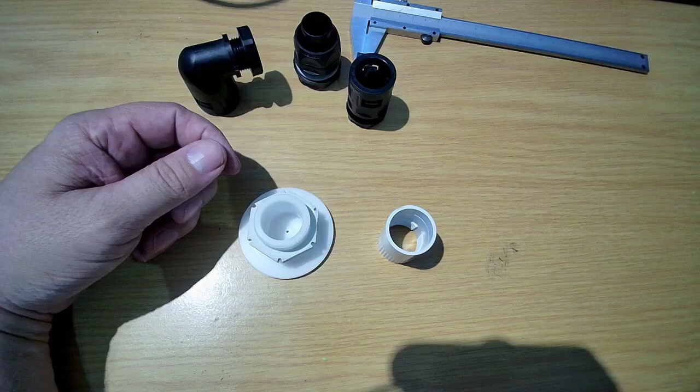So there's going to be a simple insert coupling type thing. So got this unit, and we need to have 20 mil adapters to fit in there.

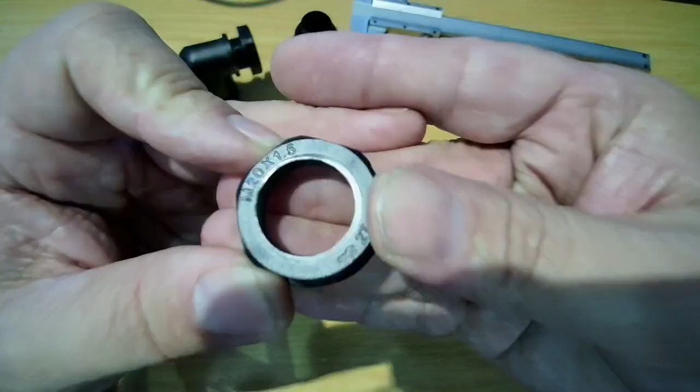This seems to be a 25 mil hole, but I don't know what the pitch is. This pitch I know is M20 by 1.5, straightforward.

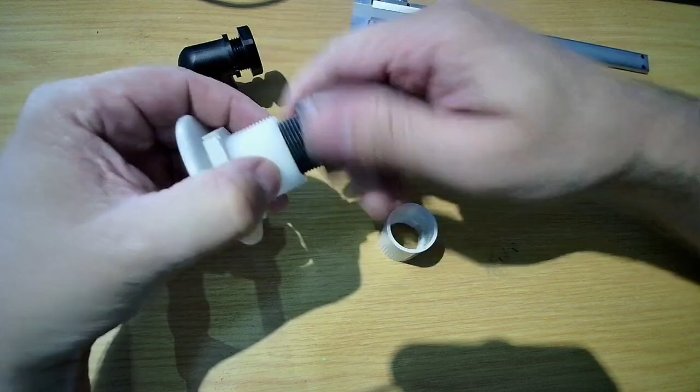I've brought this M25 with me. If it fits in there, and it actually fits quite nice. So this is a, just check the nut here,

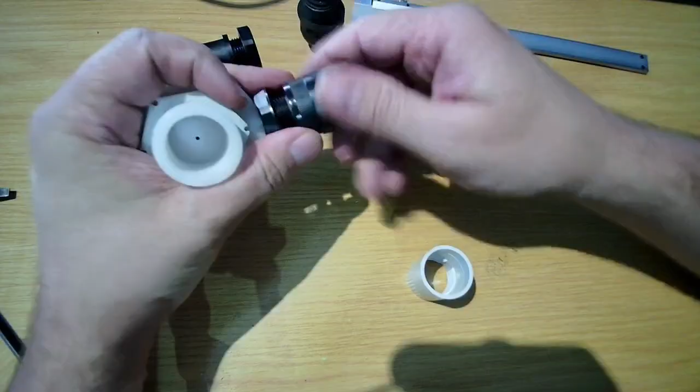M25, also a 1.5. So the inside diameter is M25 by 1.5 pitch. You don't need to worry about the outside. So we'll put an adapter in here that will fit flush, and then these units will then just screw into that adapter, and since there's enough meat to do that, sit like this.

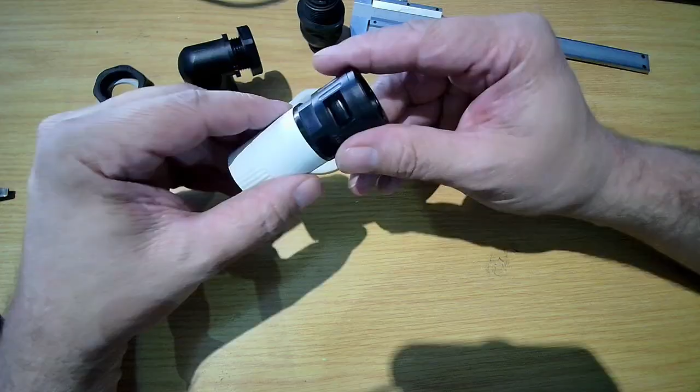Also with that, we need to make another adapter that will fit this 25, which is not threaded. So we will need to thread this out and make an adapter that fits in there, so this 20 mil can actually thread in there as well. We're going to do both simultaneously on one print. See where we get to.

I'll probably do the first print with 10% infill, just to get it out quickly and see any changes that we need to make. If it's correct, then we'll do 100% infill and set it off. This is only for non-pressurized air, therefore there's no air pressure, so we don't need to worry about leakage or any of that, so that should be fine.

So let's jump onto Fusion and see if we can log in and get started.

Right, like always, select the face, how we want to print. I want to print on that level. And we do on the first one. And let's start with this one.

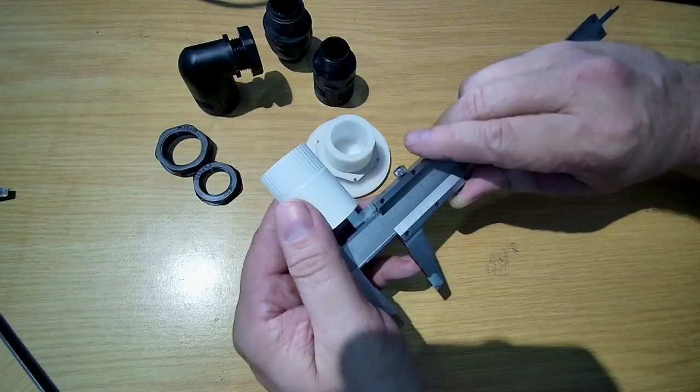Start with this one, and we know this is a 25 inner diameter. Get the tight fit, so let's make it 25 inner diameter. That means the outer diameter should be 25 on this side.

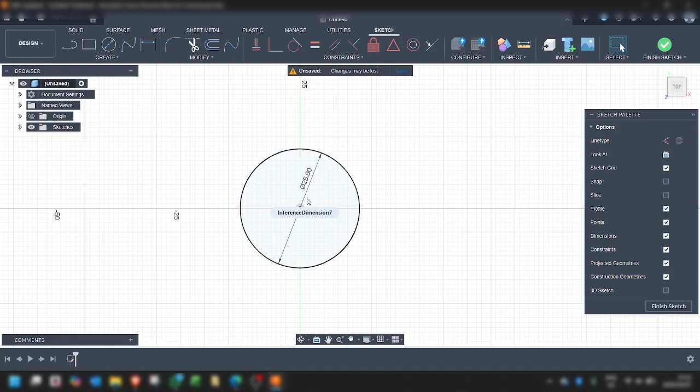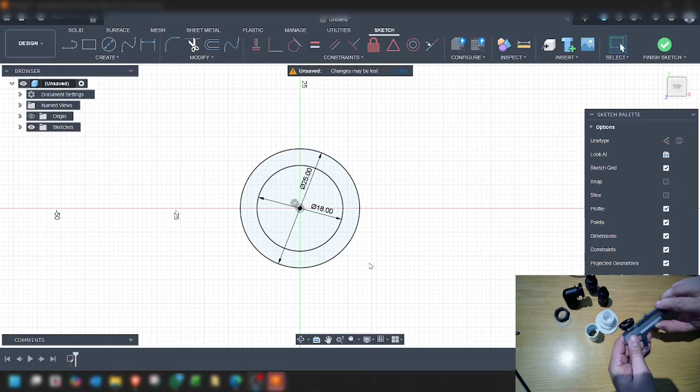Okay, let me bring you into the picture here. So I've taken a nut. Inner diameter seems to be 18, slightly over 18. I want the nut to actually be a tight fit, so I get 18 there. Yeah, that should be the basic of that.

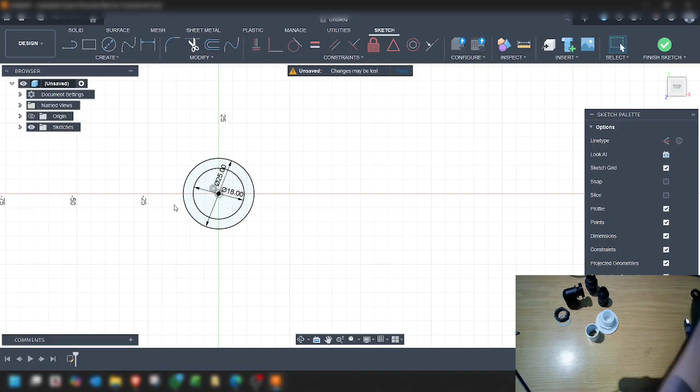So let's also start now next to it, this one, that should be 25 also, but we're looking at a 22, 23 in the diameter.

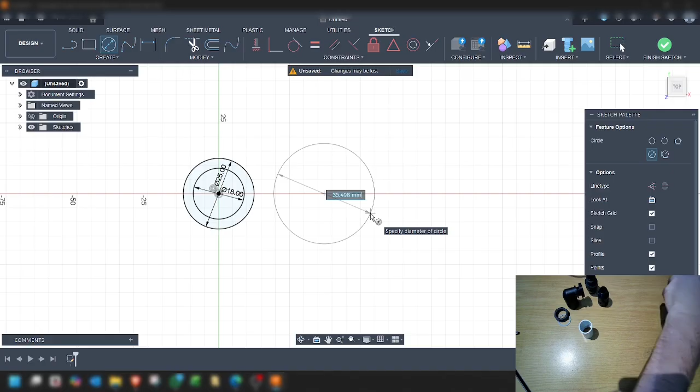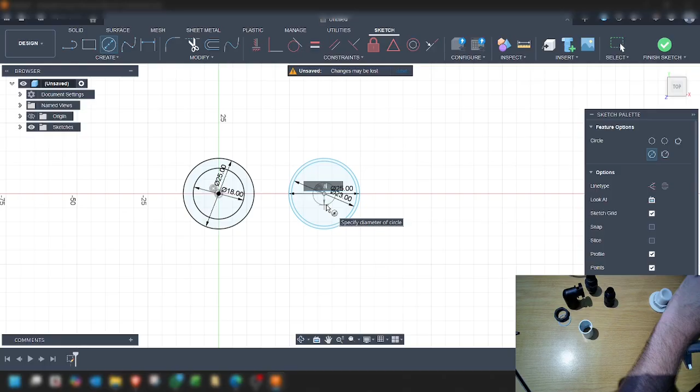I also want to give it a 25 diameter, and then for the insert also 18. Not 8, 18. Right, it's quick and simple.

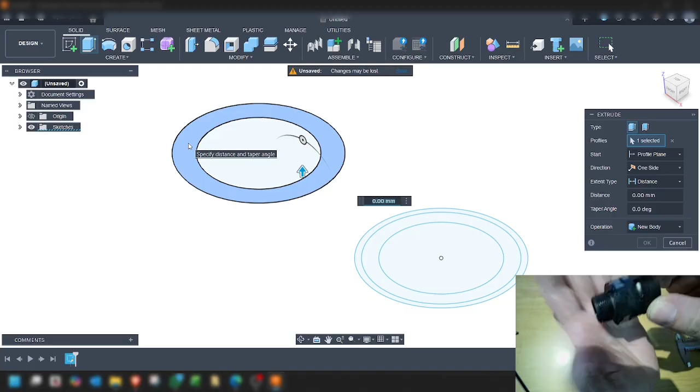It is very slow, so let's, well, this one, how long are we going to take this? Maybe the same length as that.

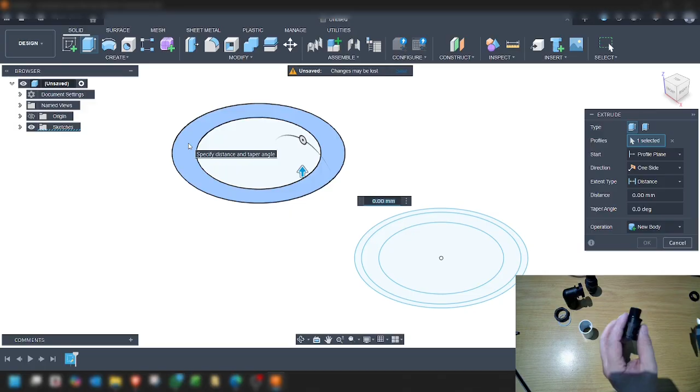That should be measuring, looks like 13 millimeters. Close to 13 millimeters. Let's make it 13.

Let's get our drawings back. Same on this one, we'll make this. I'll show you now why I've got both there. So this is also 13. There should be the clear one on the outside with the thread on the inside.

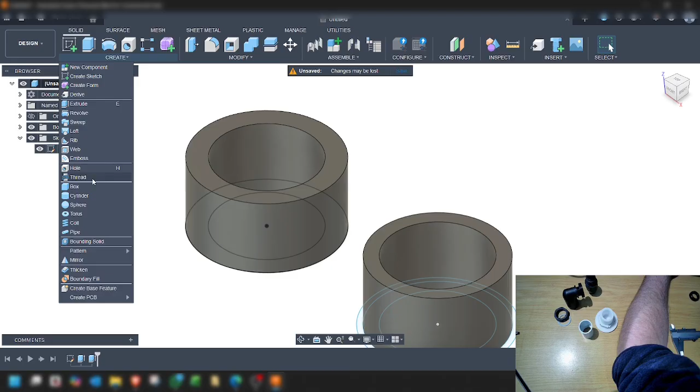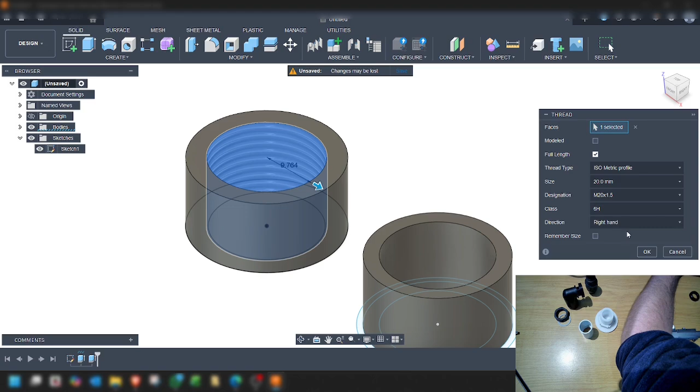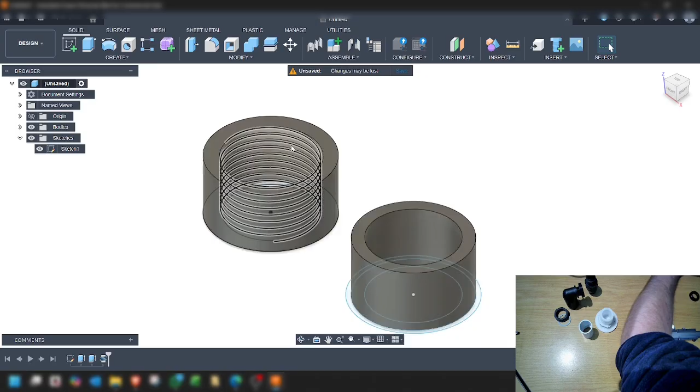So thread inside there. Size is a M20 by 1.5, 6H right hand. It should be fine. It's just safe for a while.

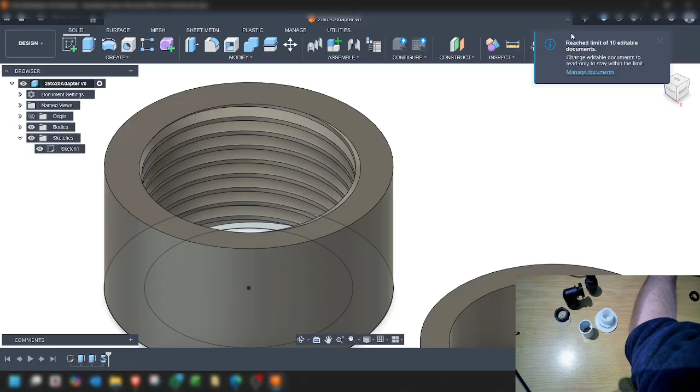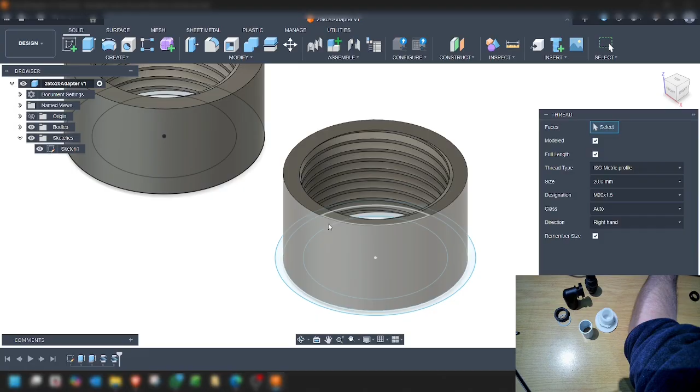And there's a 4G, 6G. I've got no idea. Give it a default, let's see what happens.

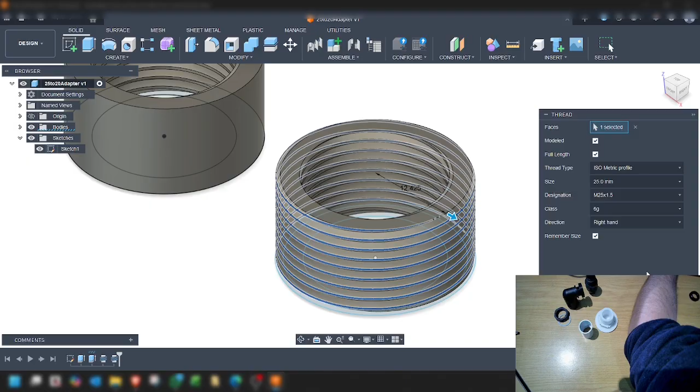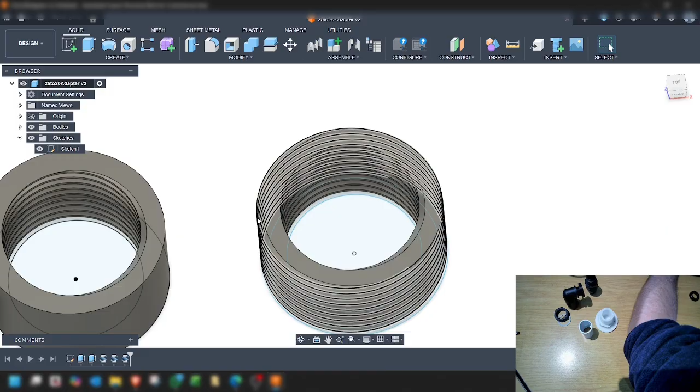Okay, so we've got it to, the problem I normally have is when I do this, even if I would take it to M25, for some odd reason it will be smaller. So that's outside 25.

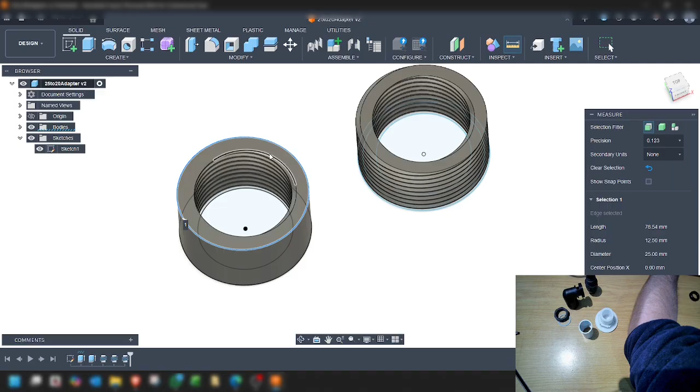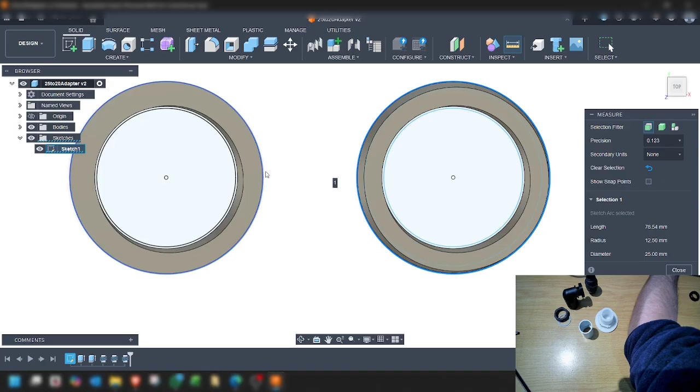And let's see that one. No, we don't do that. Let's try it again. And we've got outside diameter of 25. That should work. I don't see anything else currently.

So that was a quick one. So I'm gonna export it to the 3D printer and I'll bring you guys along.

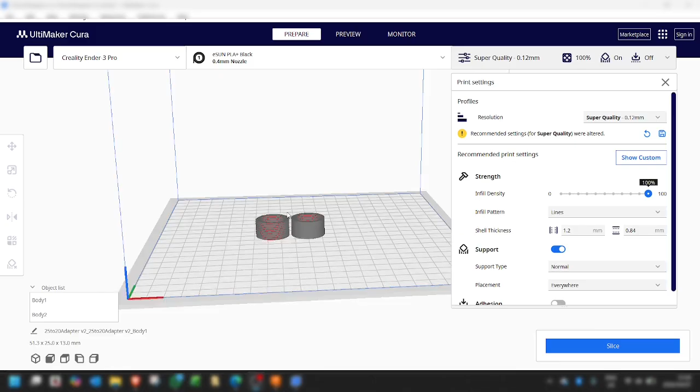Okay, so I've started Ultimaker. I've pulled in the two adapters, sockets, whatever you want to call them.

So I'm just quickly running through, making sure I don't see anything funny. I think from the last, supports, we're gonna not do any support. Remember last print we had supports. We don't need support in this. We can do a clear print.

I'm also not going to 100% print. I'm going to bring it down to 0% infill for the first one. Super quality, let's keep it at super quality. See what timeline is going to look like for printing this.

1 hour, I'd like to not wait that long. Low quality, let's do this again. 28 minutes, that's better. Remember, this is just a prototype.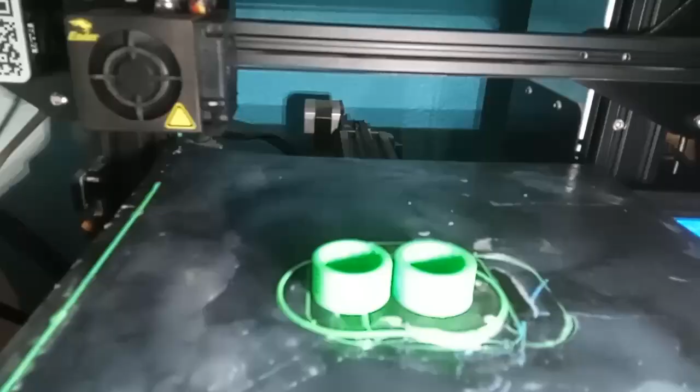Okay, so we're back. The print you just saw on the video was for the top two.

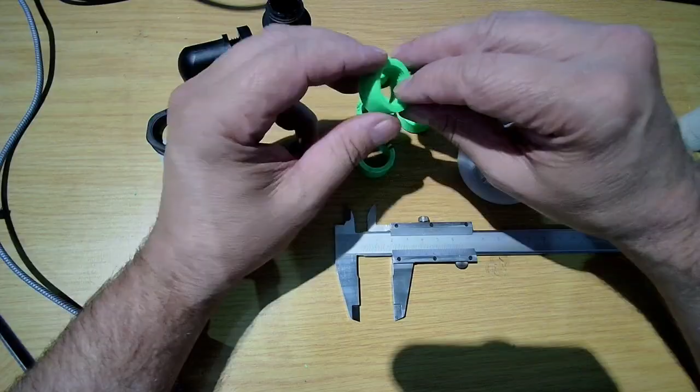I've tested them, and one thing we need to keep in mind is shrinkage. This is PLA, not supposed to shrink very much, but it does shrink. We've got a 0.25 millimeter shrink. For normal printing it's not a problem, but if you start working with threads it actually becomes a problem, to a point where it will not fit. So you can't really get it in there.

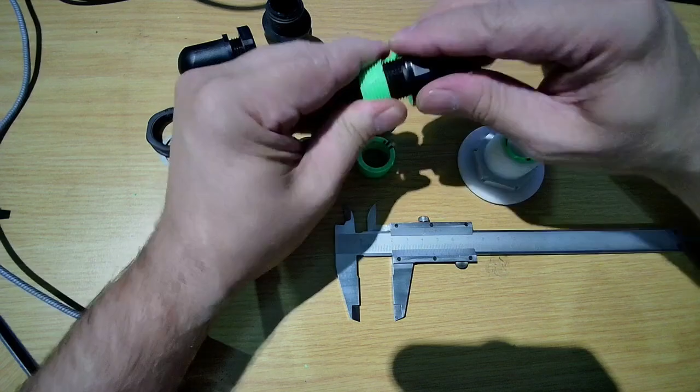So what I've done was I've enlarged it to 20.5 millimeters. This is a 20.5 millimeter hole with an M20 thread, and it shrunk back so it fits, but it's still a very tight fit. It's going on though. The outside, however, even though it shrunk, didn't really want to fit in here, went in tight.

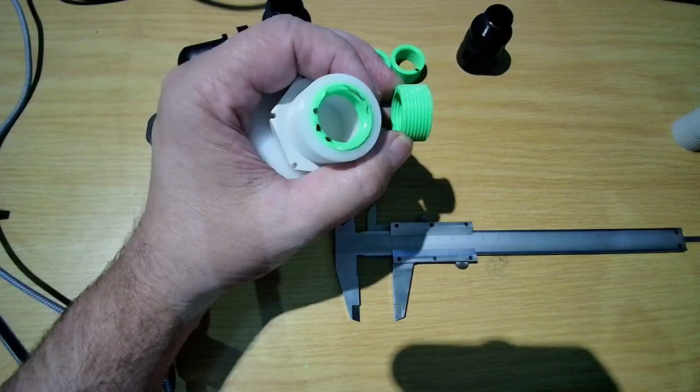So I had a look and put some whiteboard marker on it and tried to thread it in. I saw that the bottom end inside was scraping, not the front side, but the bottom end on the inside was scraping off. So I took 0.25 off that as well, and as you can see, it fits now, but I can't get it out.

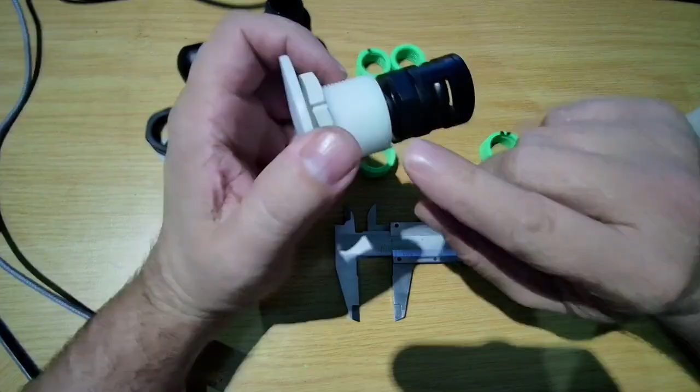So once it's in, I can thread this one in there as well, and make sure it doesn't go skew. So it's a nice tight fit. I might even add another 0.25 to the radius so we don't have this tight fit, but this is nice - for PVC and stuff.

You don't really need glue. It's going to last, it's not going to come out. Now I don't think it's going to leak as well. So maybe I'm going to leave it like this.

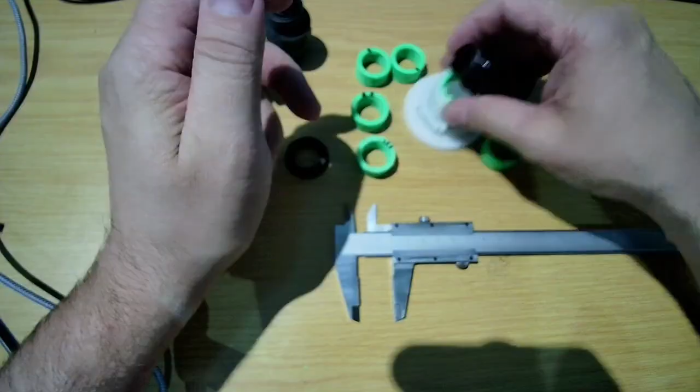So I took this and slightly tapered it from 25 to 25 and a half, which is too much. I can force it in, but the thread on these two - this one threads, and on number 2 I've copied it to thread. We had the same problem, it screws in but extremely tight.

So again, where this one had a taper to 0.5, I took this one to 0.25, slightly less taper on this side. And that actually fits in.

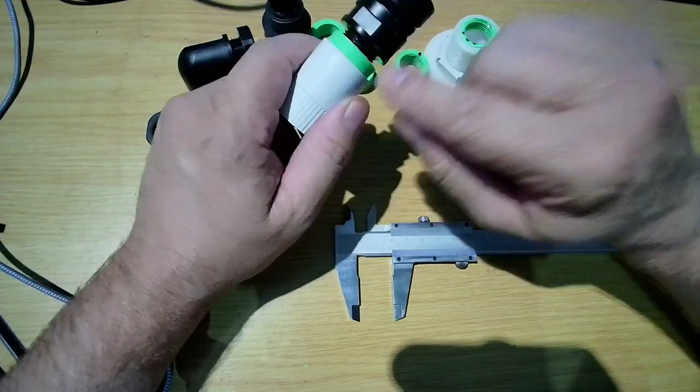I can take it even further, down to 0.15 maybe, and this will also screw in there quite easily. So this one I will still take down another 0.05, make it 0.1 on the top diameter.

Because also when I screw this in, I can feel it actually expand. It's still pushing hard on it, and I like it to expand so it forces itself inside here. And of course, since this is tapered, it's actually not a problem to get it out.

But yeah, I'll do another print off camera where I'm going to take this slightly less, and that is fine on that side.

The one problem I do have on my printer at the moment, something I've mentioned in previous printings as well - I've done this print on the side of the printer. If you look at my print, here in the center somewhere my head has got a knock in it, or a bad spot. It's not a bearing, it's not the belt, and I've had it since I replaced the head on my printer. So I need to take everything off again sometime.

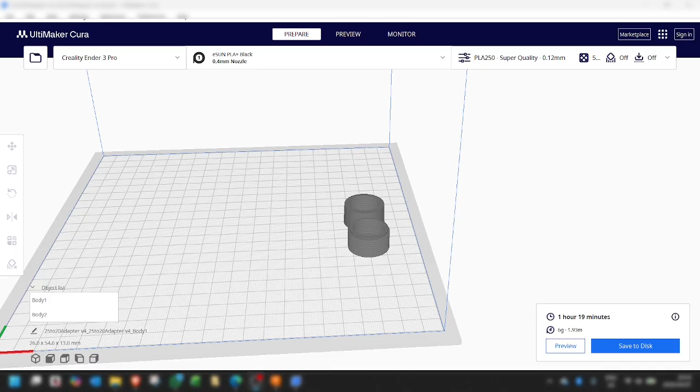Now having a look, that causes - see if you can see it on there. If you go back here, I don't think you're really going to see it, but there's a slight indent. See there on the side. And that's after I've scraped it off. Yeah, you can see it. And that is in line with where the knock is.

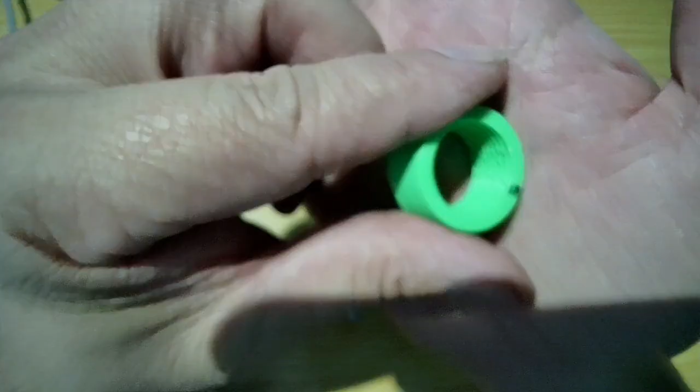If I move that - see inside as well, there's a line there. It's right in line where, if you move the head from side to side, it's not stuck, but you get an uneven flow - it's like flow, flow, you know, it tips and then goes on, and you can feel it. That's in line with this mark, and I've got a feeling this has got something to do with my threading at the moment.

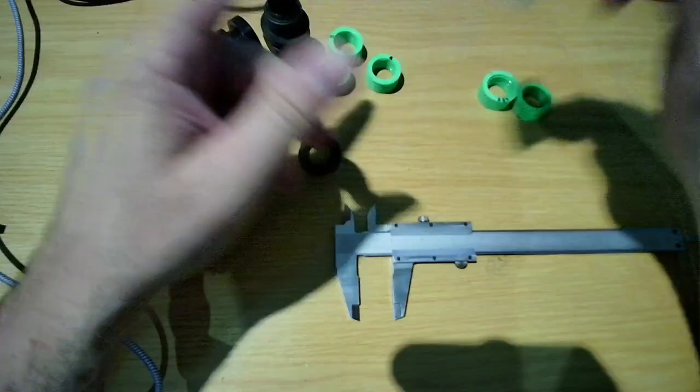The fact that this stuff doesn't really fit - this is number 1. Number 2, still the same mark on the inside. It's one of the reasons why this is going in difficult and skew, because of that fracture there. This one went better because I printed on the side of the plate, so there's absolutely no mark on this, and it actually just fits. So it might be something to have a look into in one of the videos very soon.